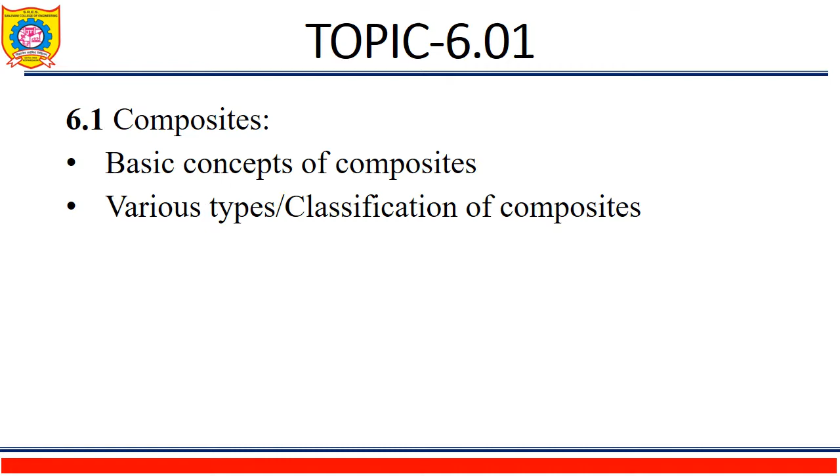Welcome to my new lecture on Unit 6, Introduction to Advanced Materials. Today's topic is composites, basic concepts of composites, various types or classification of composites. Let us start with introduction. What exactly is a composite?

A composite material can be defined as a combination of two or more materials having significantly different physical or mechanical or chemical properties that results in better properties than those of individual components. The constituents retain their identities in the composite, that is, they do not dissolve or otherwise merge completely into each other, although they act in concert.

Composites are one of the most widely used materials because of their adaptability to different situations and the relative ease of combination with other materials to serve specific purposes and exhibit desirable properties. The main advantage of composite materials are their high strength and stiffness combined with low density when compared with bulk materials.

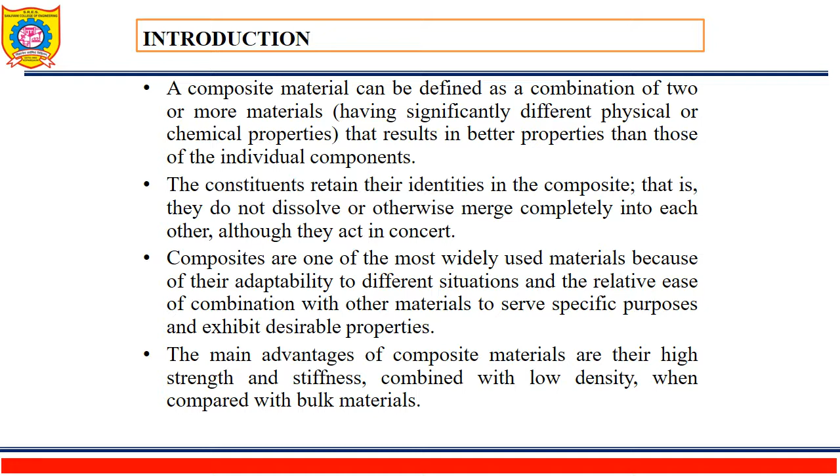Let us learn classification of composite materials. In the previous slide we have seen what is meant by composite materials. In this slide we are going to see classification of composite materials. Composite materials mainly have two constituents: a matrix and a reinforcement.

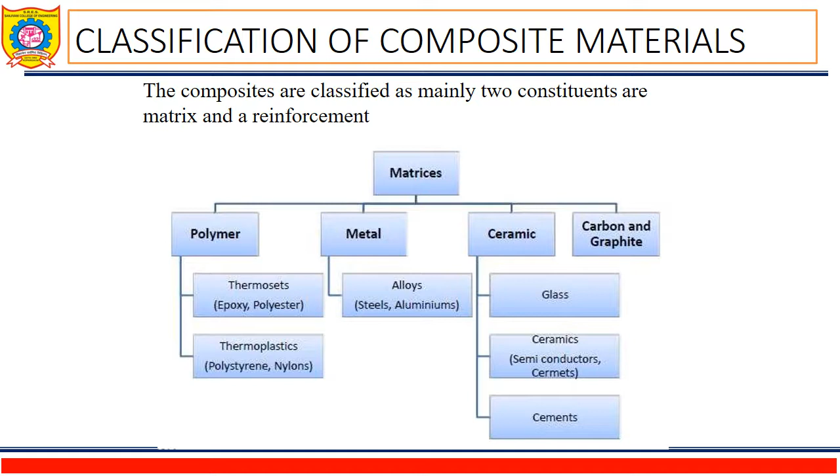Matrices may be different ones, that is polymer, metal, ceramic, carbon and graphite. In polymer there are thermosets and thermoplastics. In case of metal matrices there are alloys. In case of ceramic matrices there are glass, ceramics and cements as matrices, and the last one is carbon and graphite.

Organic or polymer matrix composites (PMCs). Two main kinds of polymers are thermosets and thermoplastics. Different thermoplastics are available in the market: polyethylene, polystyrene, polyamides, nylons, polypropylene. Different thermosets are also available in the market, that is epoxies, phenolic polyamide resins, polyester.

Thermosets have qualities such as a well-bonded three-dimensional molecular structure after curing. They decompose instead of melting on hardening. Thermoplastics have a one or two-dimensional molecular structure and they tend to melt at elevated temperature and show an exaggerated melting point. Another advantage is that the process of softening at elevated temperatures can reverse to regain its properties during cooling.

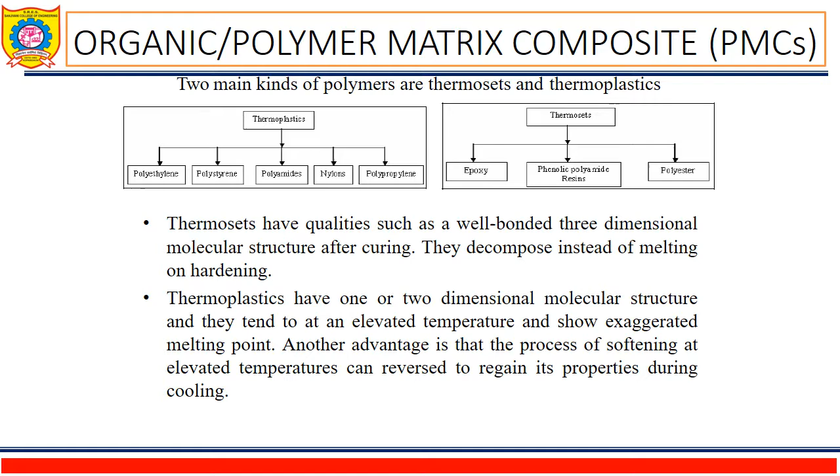Metal matrix composites, that is MMCs. Higher strength, fracture toughness and stiffness are offered by the metal matrices than those offered by their polymer counterparts. They can withstand elevated temperatures in corrosive environments better than polymer composites. MMCs are widely used in engineering applications where the operating temperature lies between 250 degrees Celsius and 750 degrees Celsius. Matrix materials are steel, aluminum, titanium, copper, magnesium and superalloys.

Ceramic matrix composites, that is CMCs. Ceramics can be described as solid materials which exhibit very strong ionic bonding in general and in a few cases covalent bonding. High melting points, good corrosion resistance, stability at elevated temperatures and high compressive strength are the advantages of ceramic materials. CMCs are widely used in engineering applications where the operating temperature lies between 800 degrees Celsius and 1650 degrees Celsius.

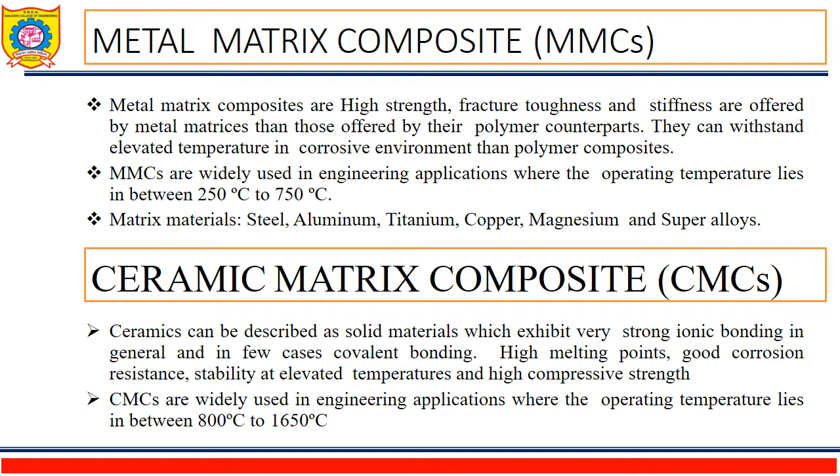Carbon-carbon matrix composites or CC composites. CCs are developed especially for parts that must operate in extreme temperature ranges. They are composed of a carbon matrix reinforced with carbon yarn fabric, 3D woven fabric, 3D braiding, etc. Carbon-carbon matrix composites meet applications ranging from rockets to aerospace because of their ability to maintain and even increase their structural properties at extreme temperatures.

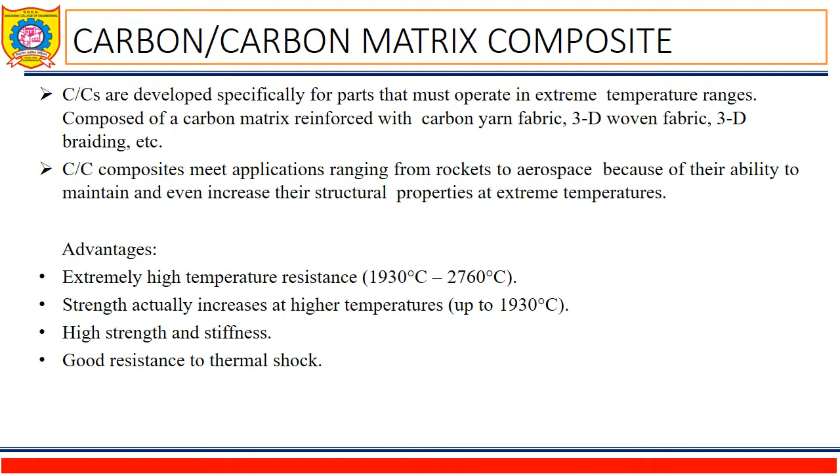The advantages are as follows: extremely high temperature resistance, that is 1930 degrees Celsius to 2760 degrees Celsius. Strength actually increases at higher temperatures. High strength and stiffness, and good resistance to thermal shocks.

Okay, let us learn now functions of a matrix. The matrix in composite material has different functions to do. It holds the fibers together, it protects the fibers from environment, it distributes the load evenly between the fibers so that all the fibers are subjected to the same amount of strain.

It enhances the transverse properties of a laminate. It improves the impact and fracture resistance of a component. It carries the interlaminar shear. What are the desirable properties of a matrix? The desirable properties of matrix are as follows.

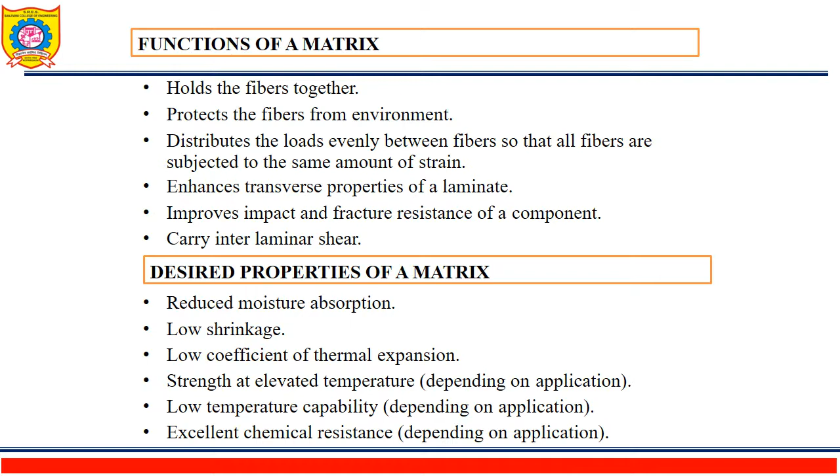It should have reduced moisture absorption. It should have low shrinkage. It should have low coefficient of thermal expansion. It must have strength at elevated temperature depending upon application. It should have low temperature capability depending upon application, and it should have excellent chemical resistance depending upon the application.

Now there is another type of classification of composite materials depending upon the reinforcements. Different reinforcements which are there, they are used as fillers here for composite materials, such as fibers, particles, laminars, flakes, fillers.

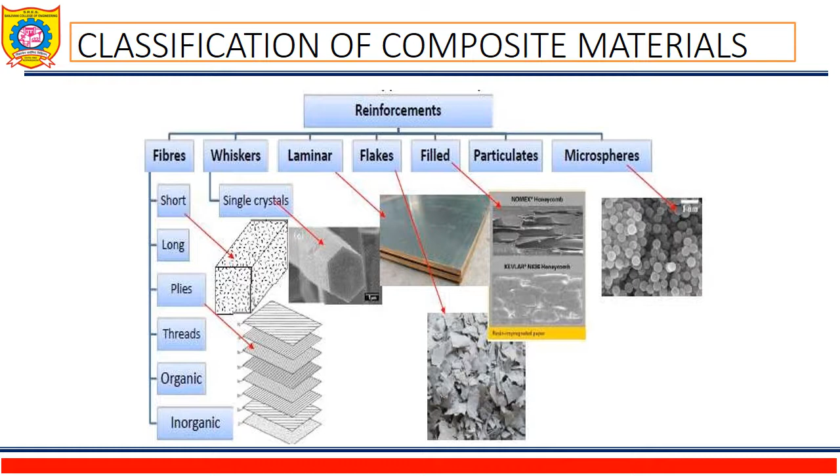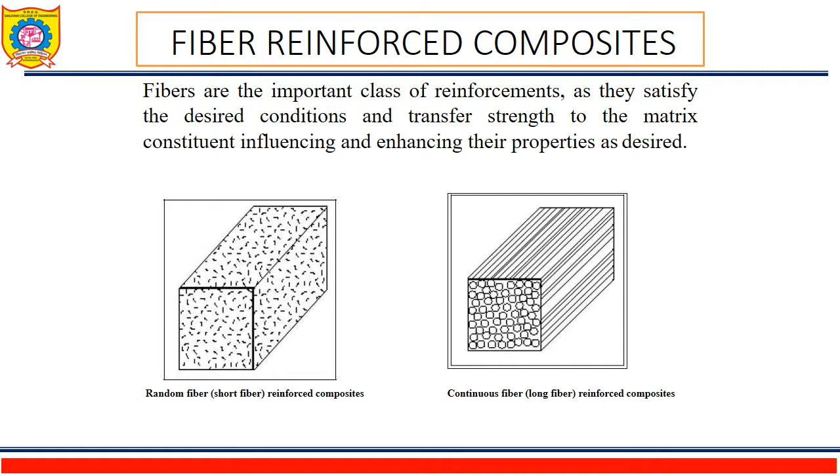So fiber reinforced composites. The fibers are the important class of reinforcement as they satisfy the desired condition and transfer strength to the matrix constituent, influencing and enhancing their properties as desired. So I have shown here two figures: random fiber reinforcement composites and other is continuous fiber reinforcement composites.

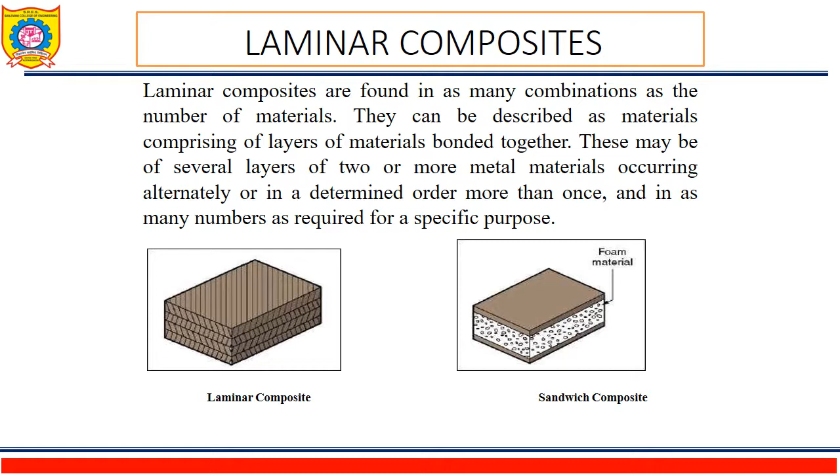Second type is laminar composites. Laminar composites are found in as many combinations as the number of materials. They can be described as materials comprising of layers of materials bonded together. These may be of several layers of two or more metal materials occurring alternately or in a determined order more than once and in as many number as required for specific purposes. Figure shows laminar composite and sandwich composite also.

Next type is particulate reinforced composite. Microstructures of metal and ceramic composites which show particles of one phase strewn in the other are known as particle reinforced composites. Square, triangular, round shapes of reinforcement are known, but the dimensions of all their sides are observed to be more or less equal. The size and the volume concentration of the dispersed distinguishes it from dispersion hardened materials. Figure shows the particulate reinforced composite.

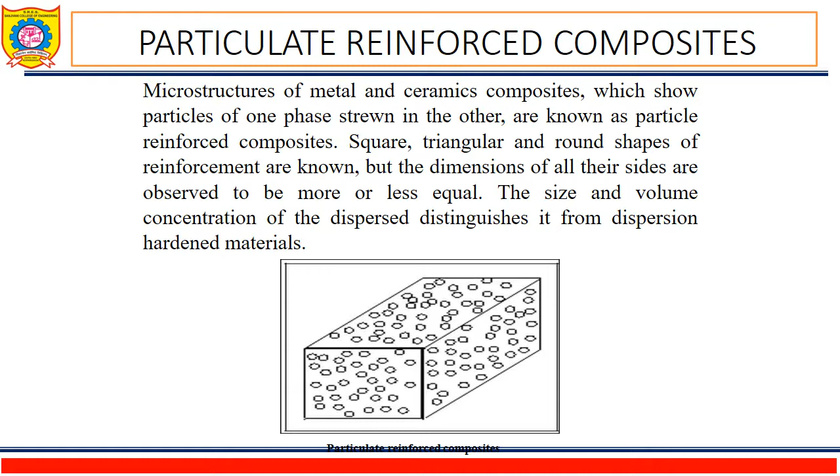Flake composites. Flakes are often used in place of fibers as they can be densely packed. Metal flakes that are in close contact with each other in polymer matrices can conduct the electricity or heat, while mica flakes and glass can resist both. Flakes are not expensive to produce and usually cost less than the fibers. Figure shows flake composite schematic diagram.

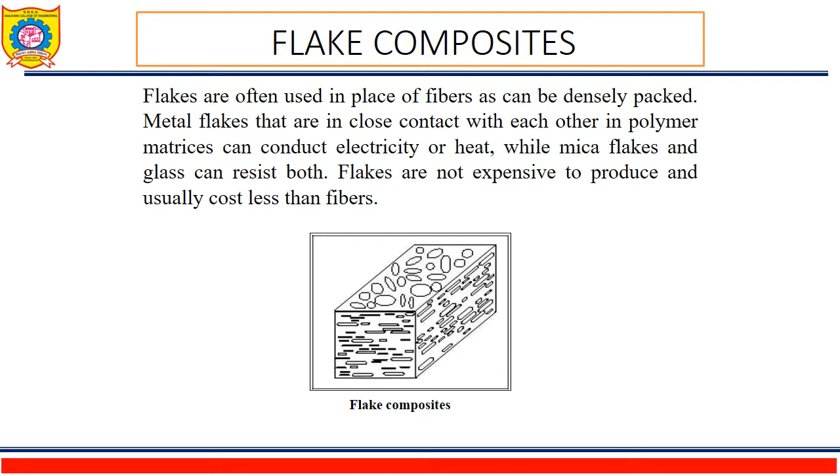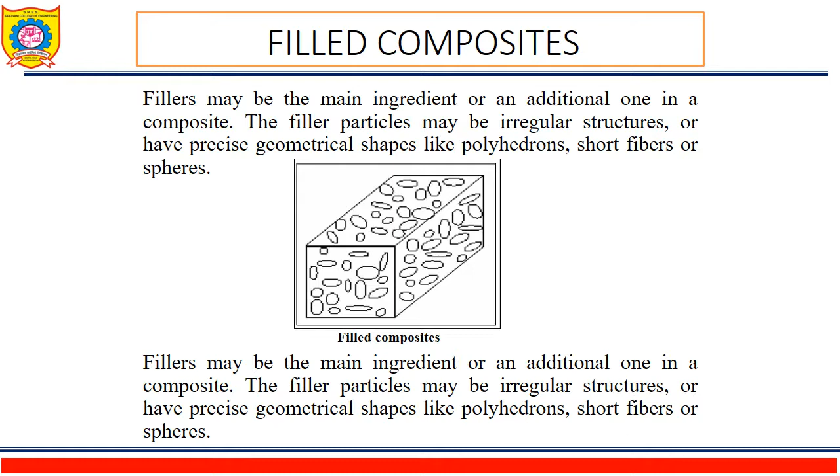Filled composites. Fillers may be the main ingredient or an additional one in a composite. The filler particles may be irregular structures or have precise geometrical shapes like polyhedron, short fibers, or spheres.

Microspheres. Microspheres are considered to be some of the most useful fillers. Their specific gravity, stable particle size, strength, and controlled density to modify products without compromising on profitability or physical properties are their most sought after assets. Solid microspheres have relatively low density and therefore influence the commercial value and low weight of finished product. Studies have indicated that their inherent strength is carried over to the finished molded part of which they form a constituent.

Hollow microspheres are essentially silicate based, made at controlled specific gravity. They are larger than solid glass spheres used in polymers and commercially supplied in a wider range of particle sizes.